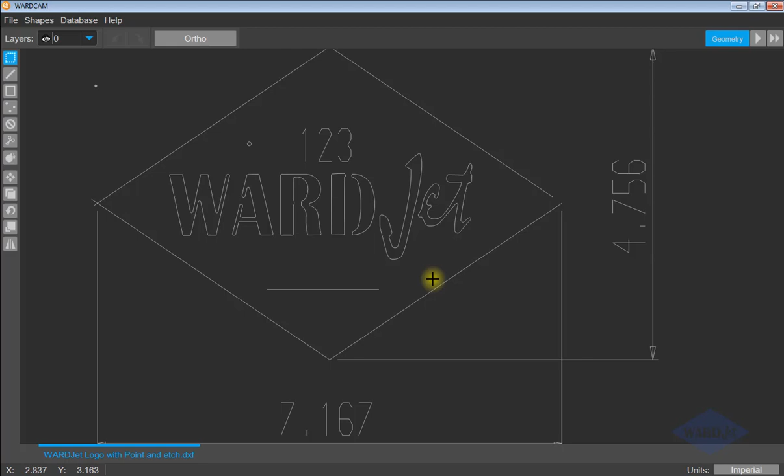So with your mouse, you've got your scroll wheel. You can roll the middle wheel on your mouse backwards and forwards to zoom in and zoom out. If you're zoomed way out, if you double click on your scroll wheel, it'll fill up the extents of your screen with the parts. If you hold down on your scroll wheel, you can pan around. And then for selecting things, by default, this select tool is activated. If you do have a different command activated, you can just press escape on your keyboard and it'll go back to the select tool being active.

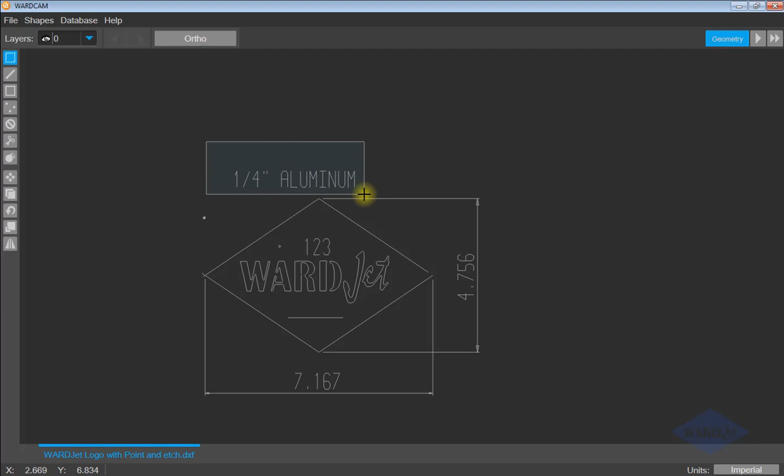And then for selecting things, if you click and hold and drag a box from left to right, whatever you're trying to select has to be entirely within the box. If you drag a box from right to left, whatever you're trying to select just has to be touching or within the box. So if I want to select these two lines here, drag a box from right to left, so left click, drag, and then release, and it'll select those.

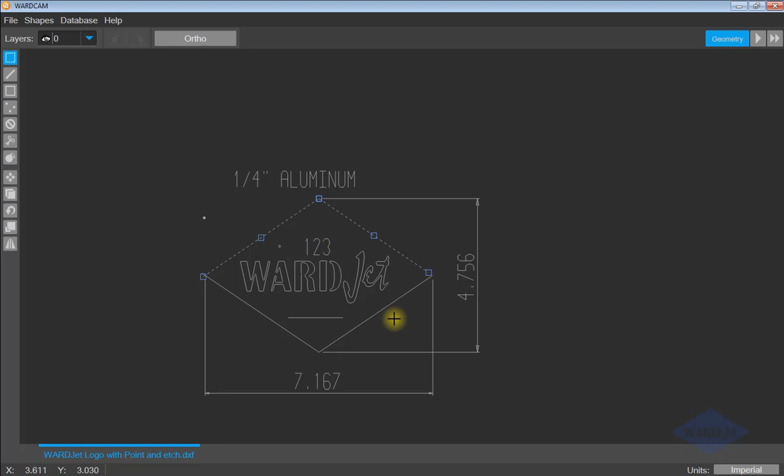If I want to select additional things, I can hold down my control key and select. If I want to deselect something that I've selected, so if I inadvertently select that, I can hold down my control key and select it again, and it'll deselect it. So as long as you keep your control key held down, you can toggle between selecting and deselecting. And then if I press escape, everything will be deselected.

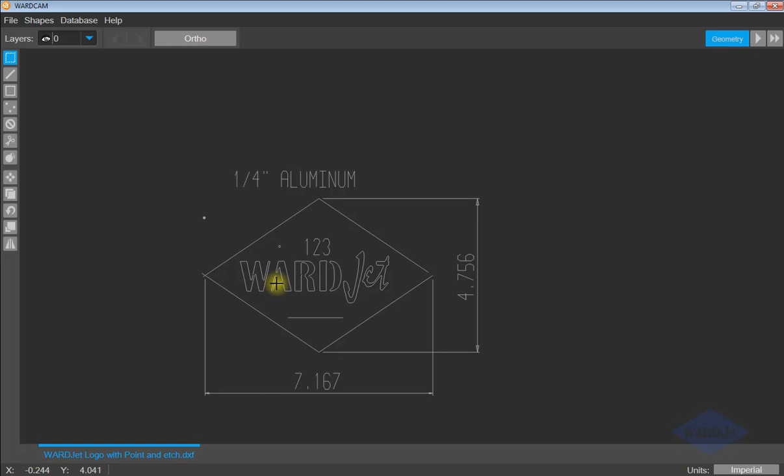So working across the top here, we have a layers box. So if somebody drew something in multiple layers, you can use the layers tool here to filter things down. So in this drawing here, we've got some information on a 0 layer, and hopefully the dimensions are on this dimension layer. You've got the little eyeball next to each layer, so if the eyeball is dark like this, that means that that layer is visible.

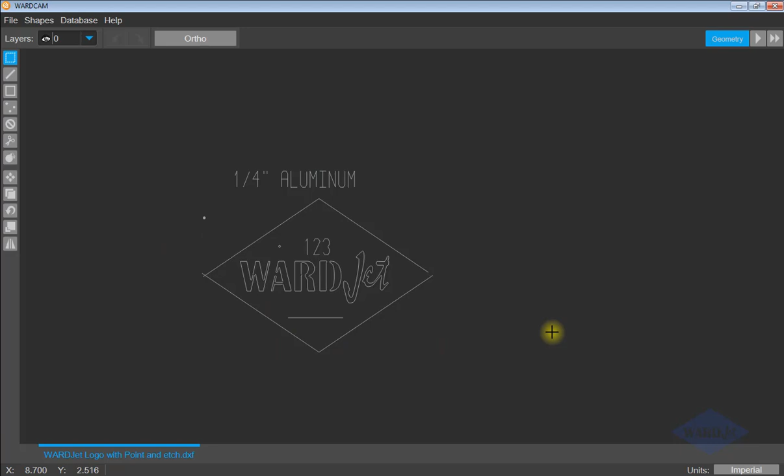If you click on an eyeball, that eyeball becomes kind of shaded out, and then if you click out of that layers box, that layer is now hidden. So it's still there, but it's just not visible. And if you click on the eyeball again and then click out of the box, then that layer will be back.

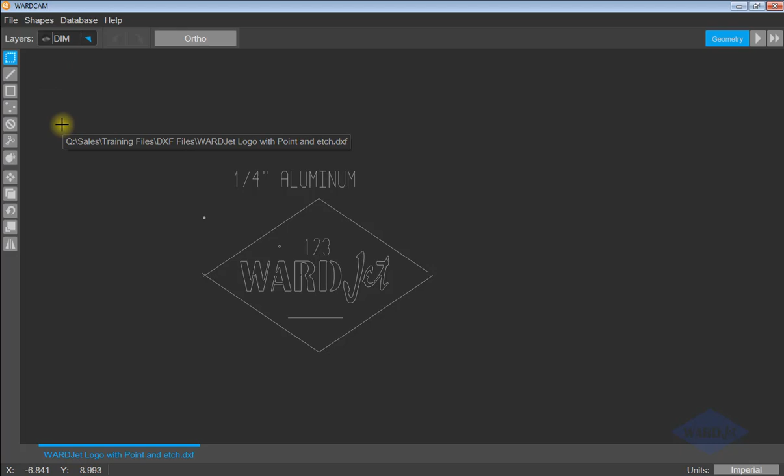And if you have this pulled down and you click on the layer, you'll switch to that layer. So one thing to be careful about is if I, for example, switch to that dim layer and then turn that dim layer off and try to draw something, it disappears because I'm on the dim layer and it's turned off, so anything I do is going to disappear as soon as I get out of that command.

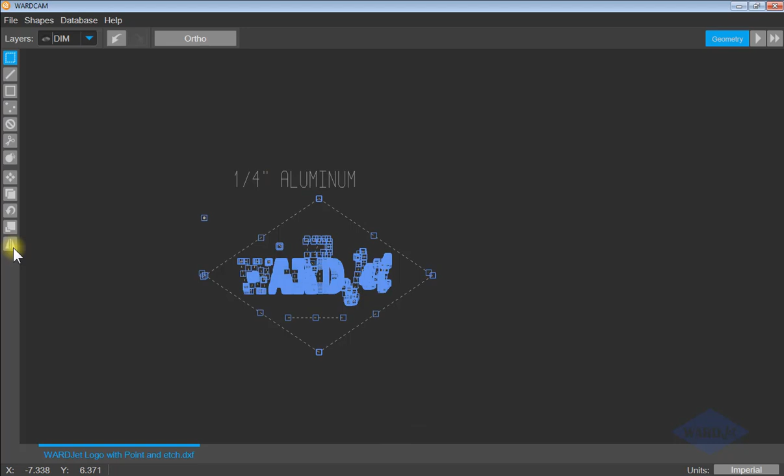So sometimes customers might want to copy something. If I select this and use the copy tool down here, which we'll get into in a bit, because I want to do a manual nest of something, and I'm clicking and don't see anything - again, it's because I'm on this dim layer which is turned off. If I turn that dim layer back on, then lo and behold, there's all that stuff that I copied.

So we do have undo and redo buttons here. If you do something wrong, you can go back and forth and revert back.

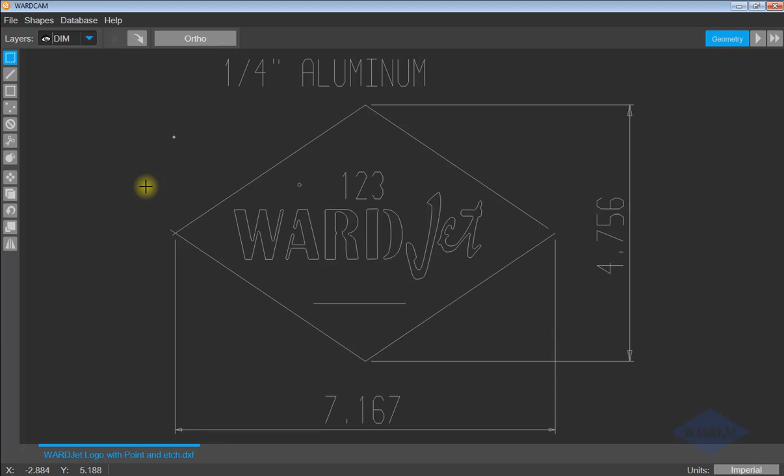And then the ortho button up here is used if you're doing things like moving and copying and you just want to move in 90-degree increments - you can turn on the ortho button. So if I want to draw a line, click on the line button, and if I turn on the ortho button, blue means it's on. If I left click, then I can only draw this line in 90-degree increments.

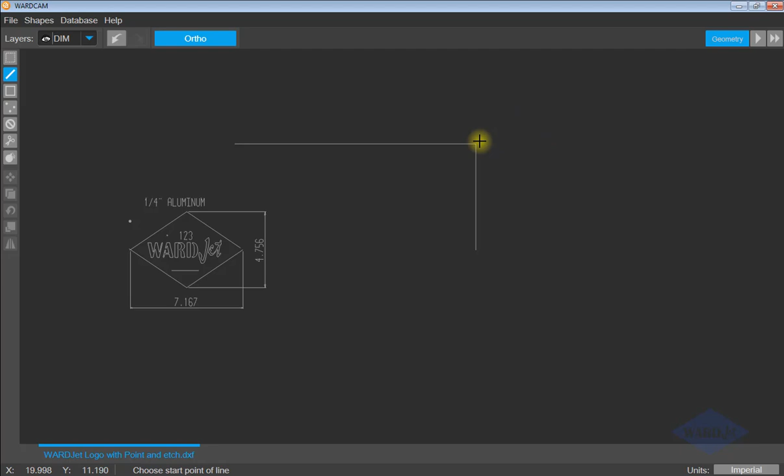When you're doing things like lines, when you hover towards the end of a line, you'll see a little blue box show up. That indicates that if you left click, you'll snap right at the end of that line. Now, WARDCAM is not meant to be a CAD package, so if I want to draw a line of a specific length, I can't do that. I can approximate it, but basically this line tool is meant as a cleanup tool here.

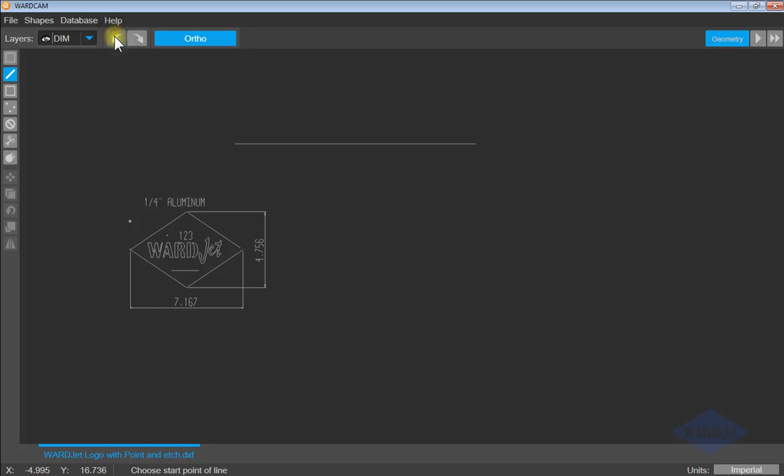So for example, on this file here, we've got this big gap, so I can use this line tool to close that up. Since my line tool is active, I hover near the end of this line, the blue box shows up, I left click, then hover near the end of this other line till the blue box shows up and left click, and now I've closed up that geometry. So that's the line tool. If I hit escape again, it goes back to the select tool being active.

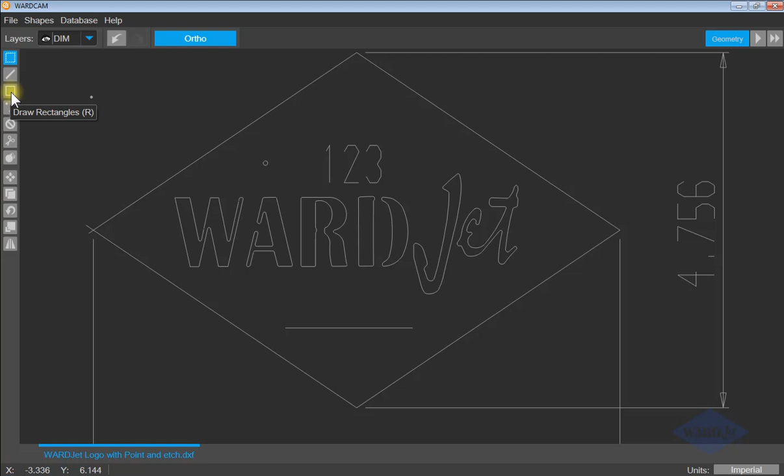Next box option down here is the rectangle box. This is used to force your lead-ins to be on a particular side of a cut. Sometimes you'll get a situation where you might want to cut this rectangle and you're cutting it out of a piece of bar stock. If I just quickly process this here as it is and wait for this...

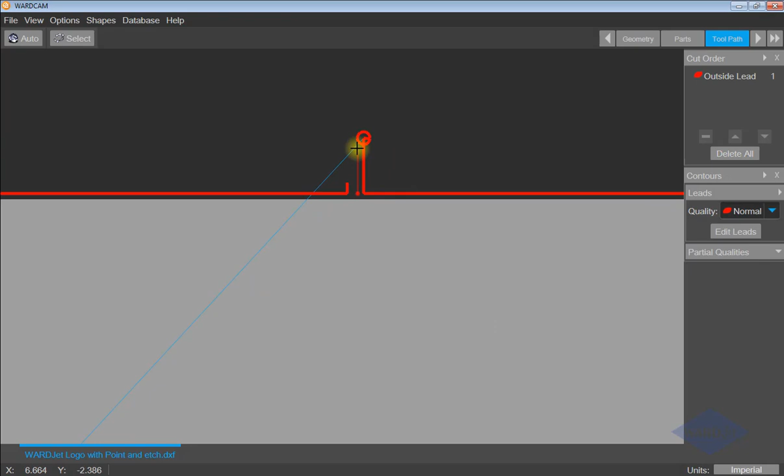All right, so if I add a toolpath on this right now, it's going to put my lead on the wrong side because it thinks that I'm trying to keep this part. So the box tool or rectangle tool can be used to switch the lead to opposite sides. If I now draw another rectangle around this rectangle - left click, drag, and left click again - and then hit my next button.

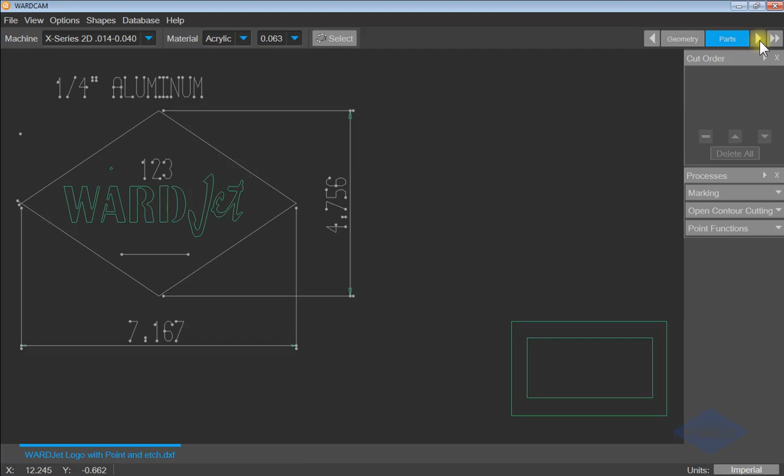Again, we'll get into these other screens in future videos. But now I go to add a toolpath to this cut here. Now it puts the lead on the proper side. So this area in the middle here is now my scrap, what's gonna drop out.

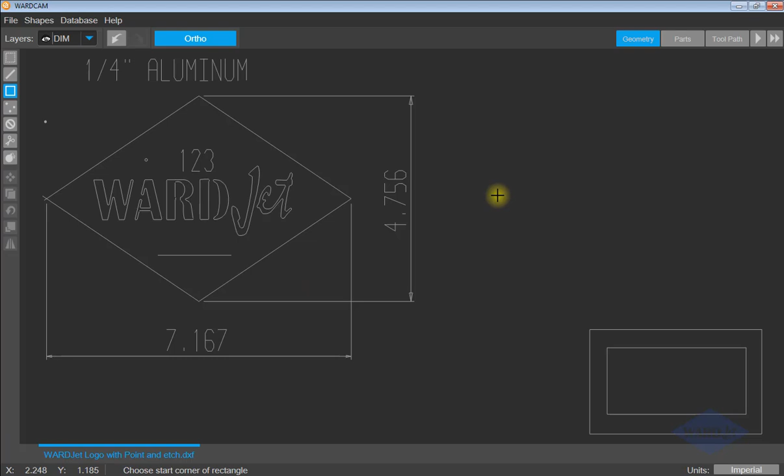Zoom out, and we'll get rid of that. Okay, so that's the rectangle tool.

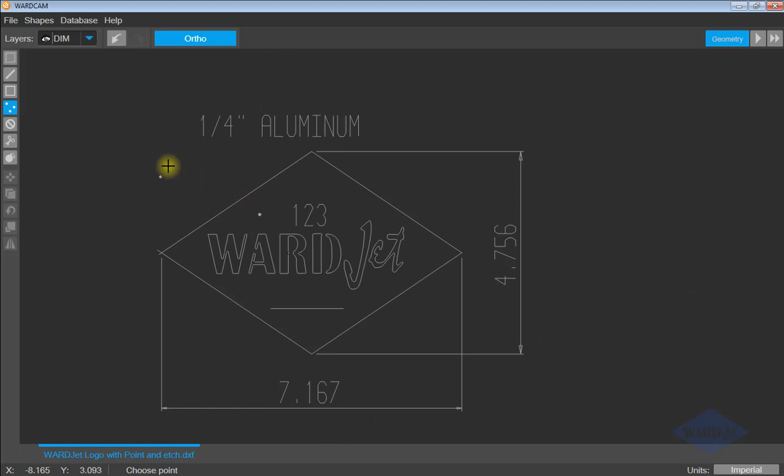Point tool can be used if you want to do something like an abrasive pierce. You want to just pierce in the center of this hole here - activate my point command, and when I hover near the center of the circle, see that blue circle shows up, that indicates that when I left click, that'll put that point right at the center of that circle. So then in the next step in the process, I'll be able to pick up off that point and tell it that I want to do either an abrasive pierce or a drill command, or you can actually program the machine just to stop. In the next step, we'll see how we're able to pick this point here as a stop function.

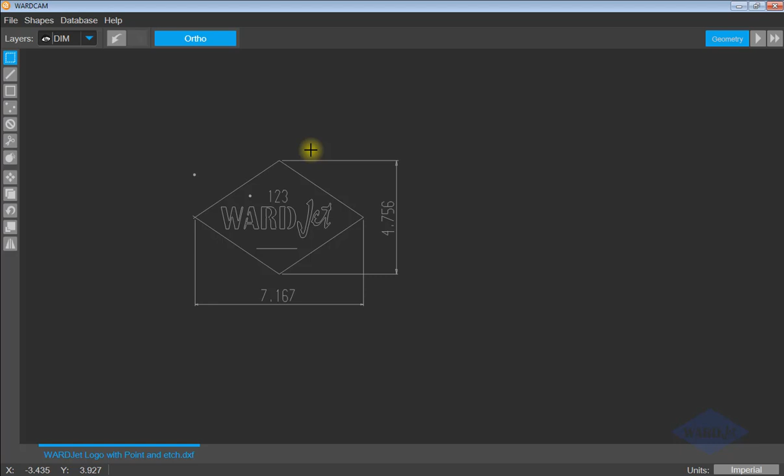Got a delete button. So if you want to delete things, you can activate your delete command, and then you can individually click on things, or you can select things and click on the delete button, or select things and just press the delete key on your keyboard. So a few different ways of deleting.

I guess we'll leave that deleted.

Trim command: if we've got some lines extending beyond the geometry that we want to cut, activate your trim command and click on the lines you want to get rid of, and it'll trim them up to their intersection point.

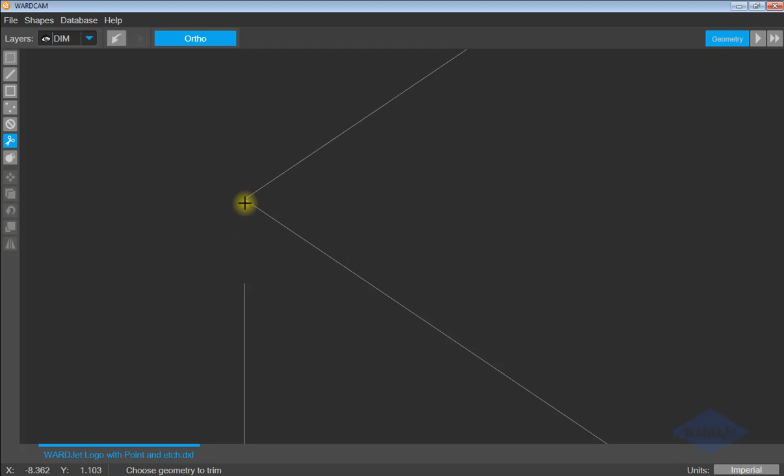This explode button can be used if you need to manipulate geometry that's connected as one entity. Right now this rectangle is one entity, so if I wanted to delete just this top line using the delete button, it would delete the entire thing because the whole rectangle is one polyline or joined entity. So if I use my explode button and select this, then go back to my select tool, I'm now able to select the individual lines in that geometry.

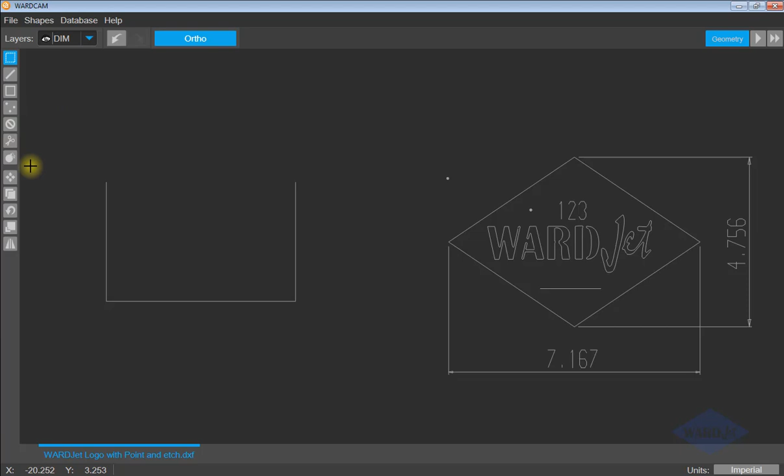Then we've got things like move, copy, rotate, scale, and mirror. I'll work with this little rectangle here for these commands. For any of these, you have to select something first before you do it, so I'll go ahead and select this rectangle.

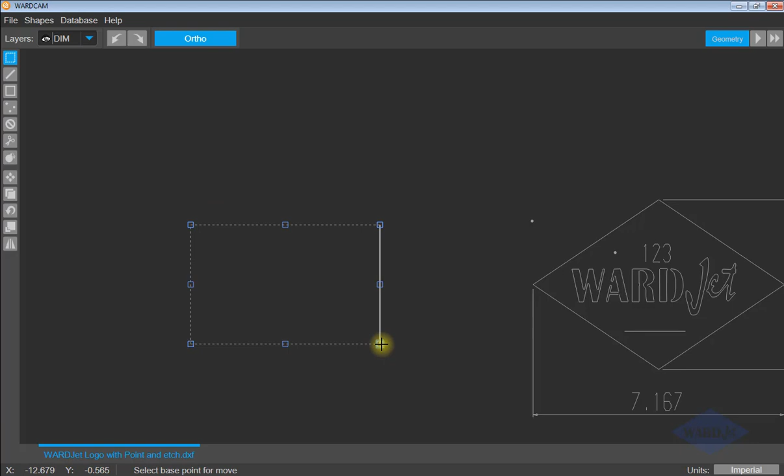If I want to move it, I just click on the move command. Down here at the bottom it prompts me for a base point for move. If I want to move from a specific location, like the endpoint of a line, and move it to the endpoint of another line, I can do that. Or if I just want to do a general move, I can select it, do my move command, pick a base point, click wherever, and move it.

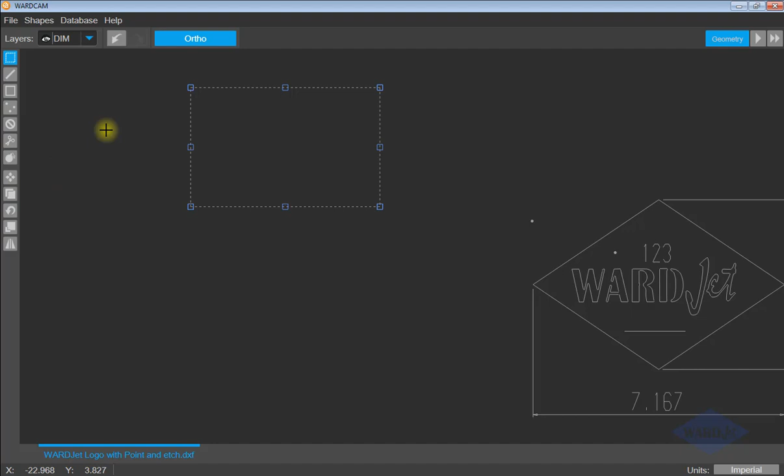Same concept with the copy command. Since this is already selected, click on the copy command, pick a base point for copy. So if I want to copy from here down to here, and so on - that's your copy command.

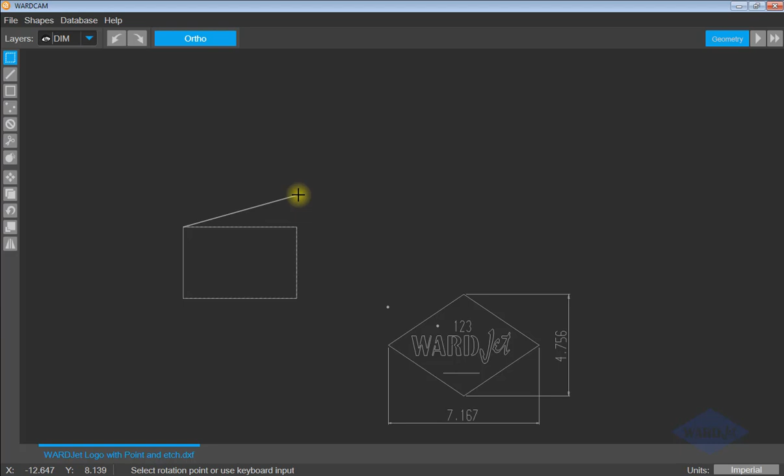Rotate command: again, select, click on rotate, pick a base point for rotation. I'll rotate from here. If I want to rotate in just 90-degree increments, since my ortho button is turned on, as I move my mouse around you'll see the rectangle gives me a ghost image at 90-degree increments. If I want to rotate a specific number, like 30 degrees, I can just type it in on the keyboard and hit enter, and it'll rotate it.

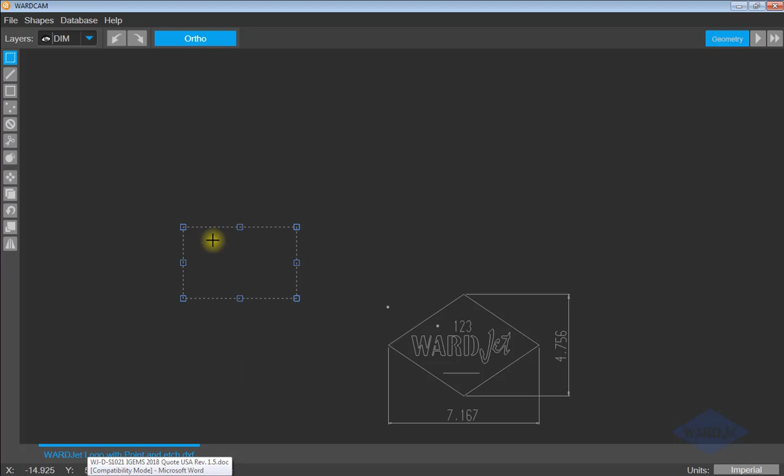Scale command works in a similar fashion. Select this, select my scale command, then pick a base point for my scale. If I want this to be twice as big, I just type 2 on my keyboard. As I start to type, this dialog box shows up; hit enter, and now this is twice as big.

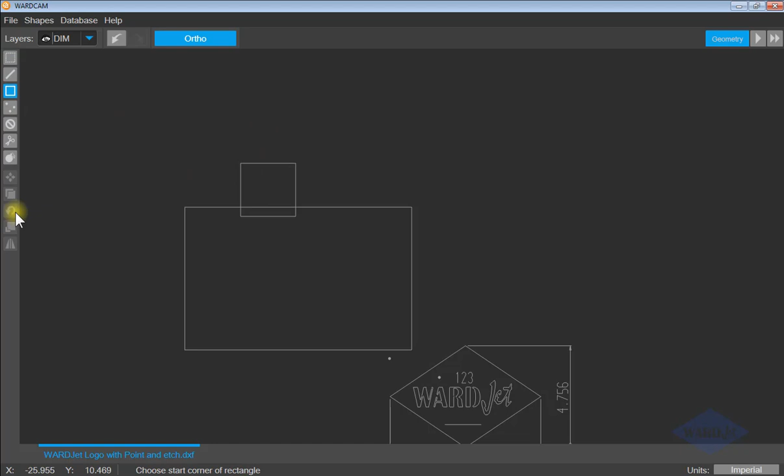There's also a mirror command. To make this a little more interesting, let me draw a rectangle here and trim this up a bit so we can see what's going on. I'll get rid of this stuff here.

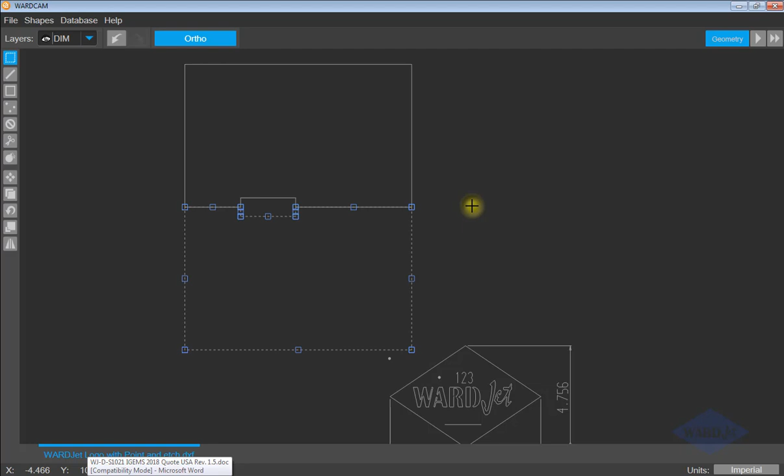Now I want to mirror this. I can select it, use my mirror command, and select the base point for mirror. If I click right on the end of that line, it mirrors it and copies it - there's no gap because I clicked right on the end of that line.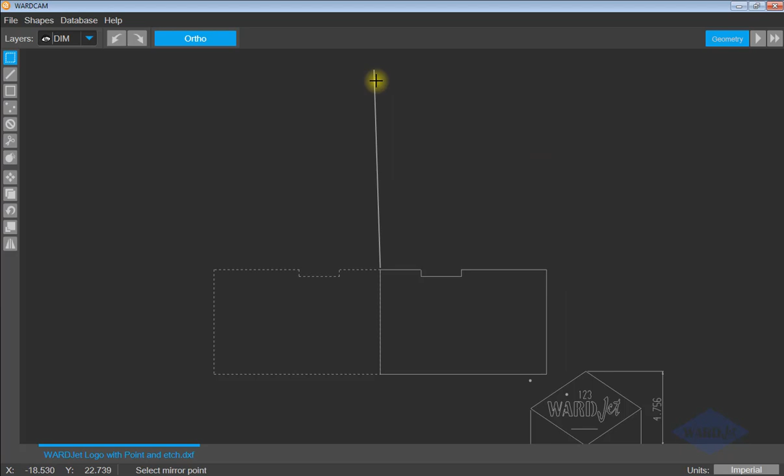If I want to give myself a little bit of a gap, I select it, do my mirror command, click a little bit off the edge of the part, and then drag across. Since I've got my ortho command selected, it'll only mirror it in 90-degree increments.

So those are the commands down the left side there, and we already talked about the coordinates down here. There is no measure tool, so unlike a true CAD package, you can't click and measure from midpoint to midpoint or things like that. The best you can do is hover the mouse and look at those coordinates to get an idea of approximate sizes.

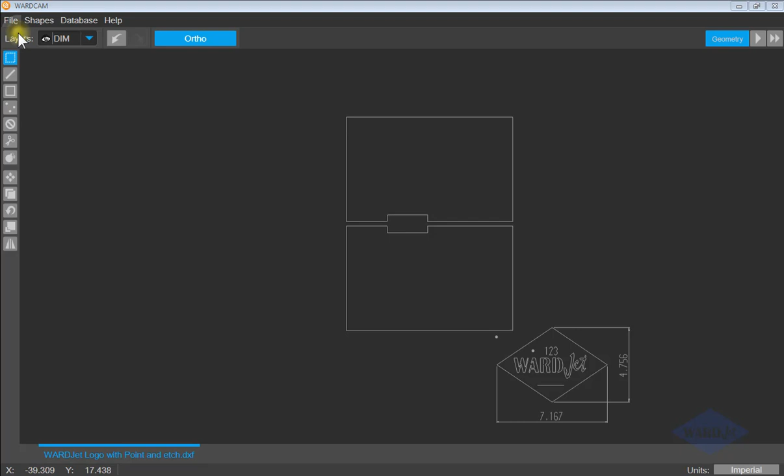Then there are tabs down here, so if you have multiple files open, I'll go ahead and open another file. You can switch back and forth between the tabs, and if you want to close something, you can just click on your middle scroll wheel to close it that way.

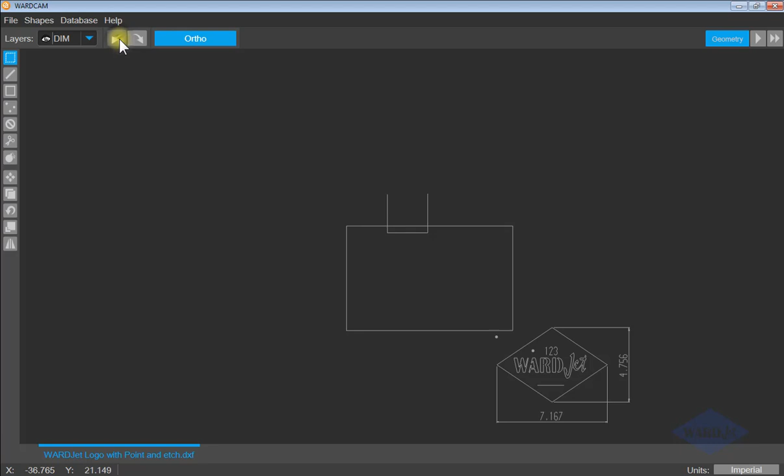All right, let's get rid of that stuff - we'll just select it and delete it.

Then in the top right-hand corner up here, you've got the different steps in the process that we'll walk through in the other videos. Once you're done with your geometry screen, you can just hit the next button, and it brings you to the part screen that we'll talk about in the next video. Thanks.